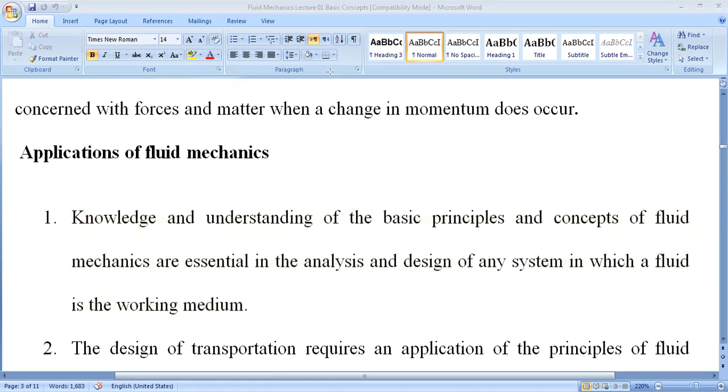Secondly, the design of transportation requires an application of the principle of fluid mechanics. This says that all transportation designing systems require basic principles of fluid mechanics.

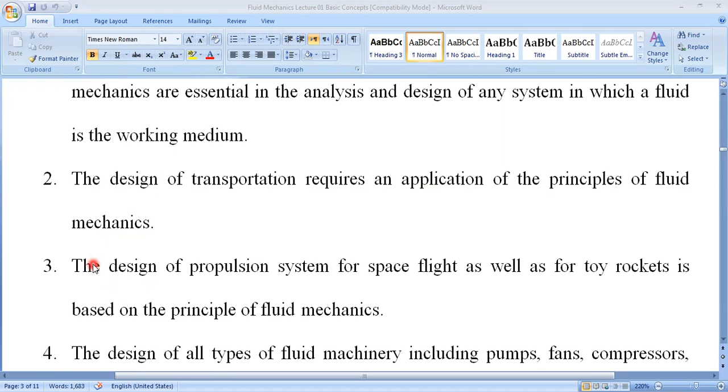Next, the propulsion system of space flight as well as toy rockets is based on a principle of fluid mechanics. Actually, all those systems in which gases or liquids are used, knowledge of fluid mechanics will be very helpful for better understanding.

The design of all types of fluid machinery, including pumps, fans, compressors, and turbines, clearly requires knowledge of basic principles of fluid mechanics. These machineries are basically related to fluid, or the medium in which liquid or gases are used, which is a material medium. So to study all these things, we should have better knowledge of fluid mechanics.

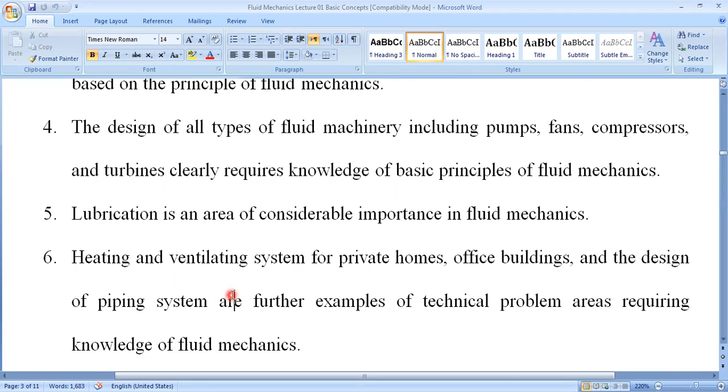Similarly, lubrication is important. Lubrication, heating and ventilating systems for homes, offices, buildings - all these systems basically require a very solid knowledge of fluid mechanics.

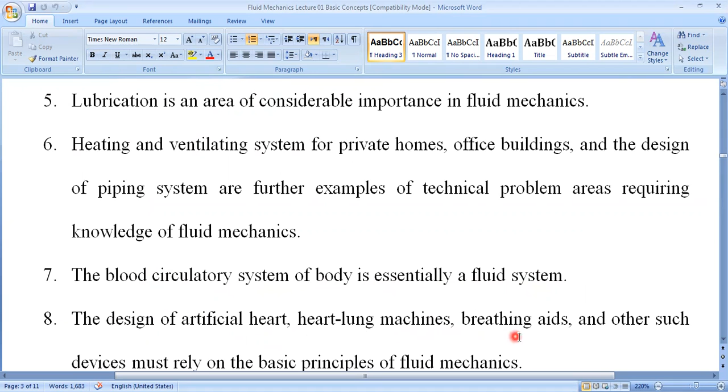Blood circulatory system is essentially a fluid system. The design of artificial heart, heart-lung machines, breathing aids, and other such devices must rely on the basic principles of fluid mechanics.

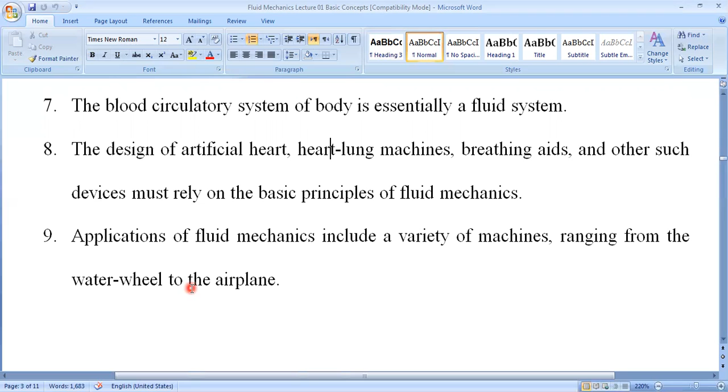The application of fluid mechanics includes a variety of machines ranging from water wheel to airplane. We have a lot of machineries, a lot of systems, a lot of machines in which the rules of fluid mechanics are used.

Study of fluid provides an understanding of a number of everyday phenomena, such as an open window and door together creating a draft in a room. That is a very interesting phenomenon. If we have an open window and door at the same time, that draft is produced due to the motion of air. So air may be categorized under the category of fluid, and this is also included under the discussion of fluid mechanics.

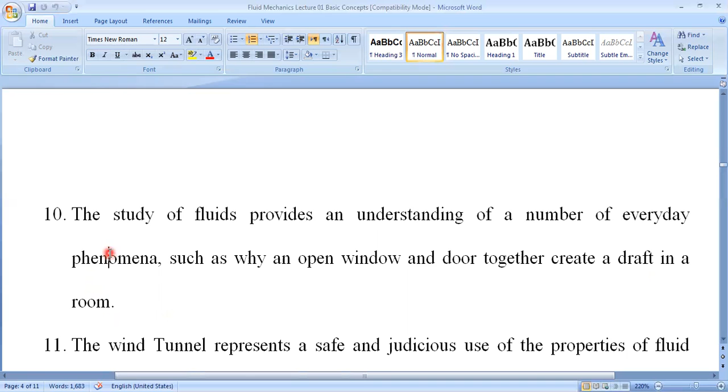Wind tunnel represents a safe and judicious use of properties of fluid mechanics. Till now, we have discussed 11 different applications or fields or places where rules of fluid mechanics may be used easily, or fluid mechanics comes into action for the study of fluid mechanics, or where fluid mechanics principles may come into play.

These 11 principles may be asked in your exam, just like a question: what is the scope of fluid mechanics, the applications of fluid mechanics, how fluid mechanics principles are important, or why these rules are important. So in such types, we may ask a few questions from you in your examination.

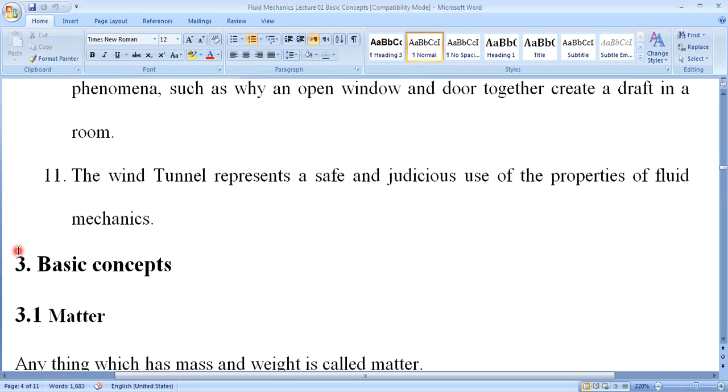Now we have basic concepts. They are very important. From here we have basically a reviewing portion. We will try to revise each and every concept, but I will not describe everything in depth, I will just try to overlook definitions or phenomena or concepts that we have discussed in this section, so that we can summarize the complete chapter, because our focus now is only to revise or to check out our checklist of those things which we have studied in our previous classes.

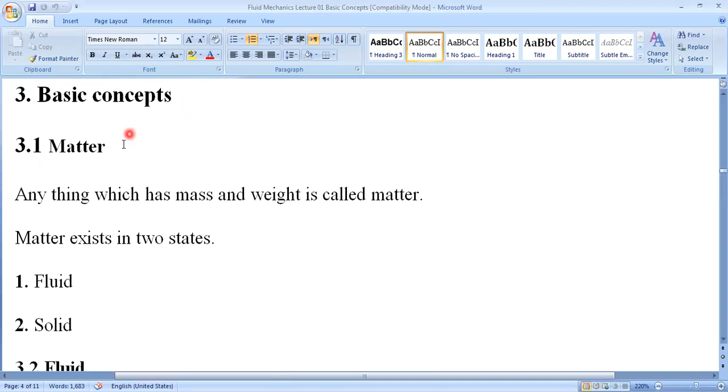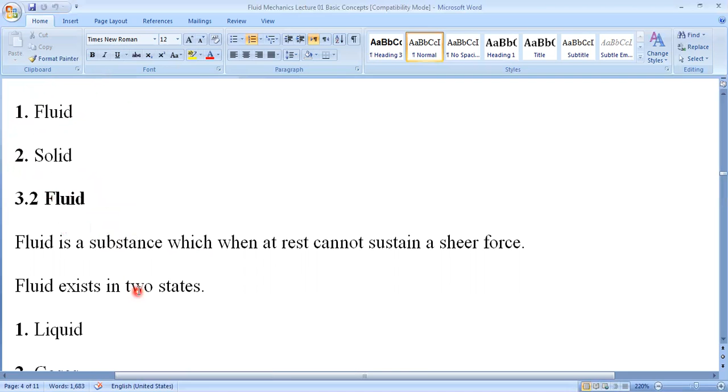First of all, we discussed a few basic concepts, including matter - the definition of matter, that what is matter, anything containing mass and weight - and further we studied that there are two broader categories, fluids and solids. Fluids are the category in which we have liquids and gases, in which liquid is categorized as incompressible flow, which has definite volume but no definite shape. And then gases were the compressible flows, which have no definite volume and no definite shape.

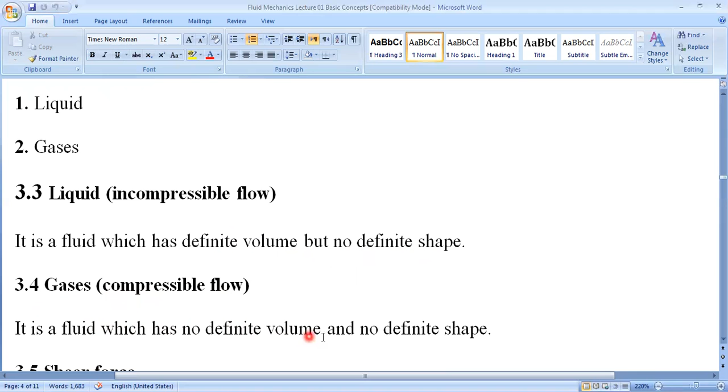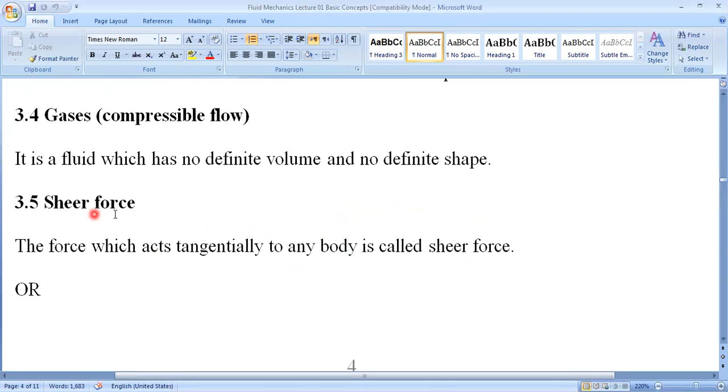After that, there was a concept of shear force. The force was acting along two components, along the surface and normal to the surface. The component of a force that was acting tangentially or along the surface of any body was termed as shear force. So the tangential component of the force is the shear force.

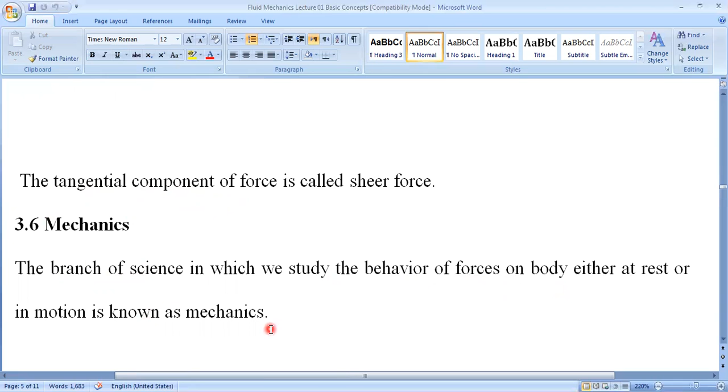The most renowned definition of mechanics: the branch of science in which you study the behavior of force in a body either at rest or in motion is known as mechanics. You are dealing with the bodies either at rest or in motion.

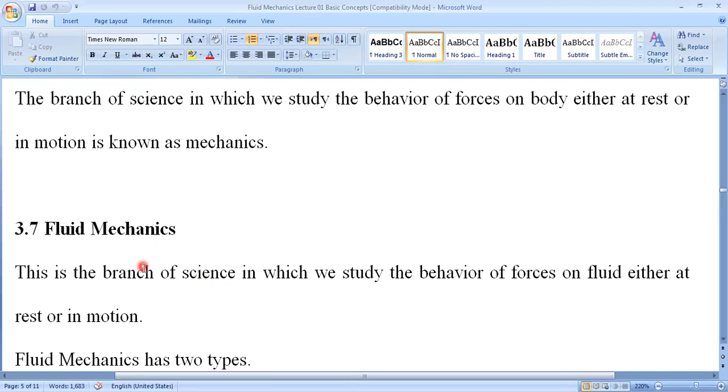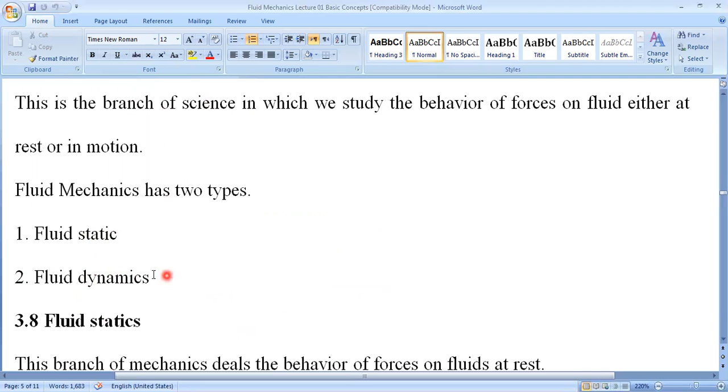After that, we categorized another category, fluid mechanics. What is fluid mechanics? In which you study the behavior of forces either at rest or in motion. If that was at rest, that was fluid statics, and if it was moving with a particular velocity, then that was discussed in fluid dynamics.

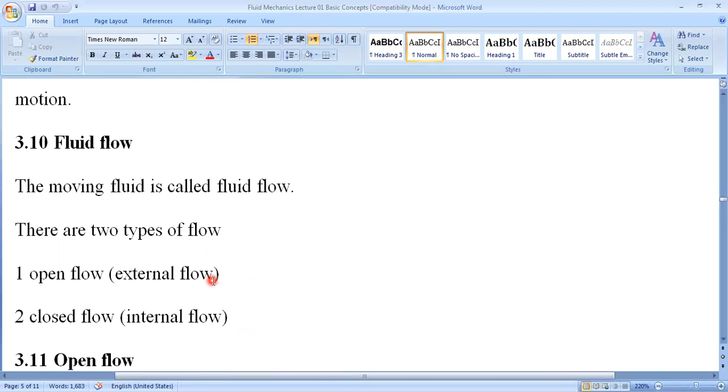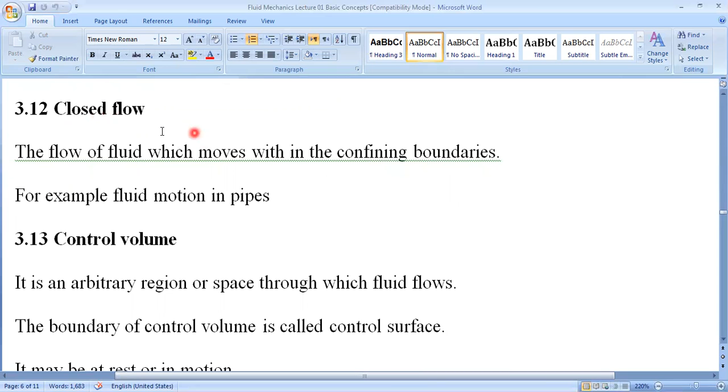Fluid flow, moving flow, was basically fluid flow. There were two types of flow: open flow and closed flow. Open flow was when the confining boundaries were at a relatively large or infinite distance, but between two confining boundaries that was a closed type of flow.

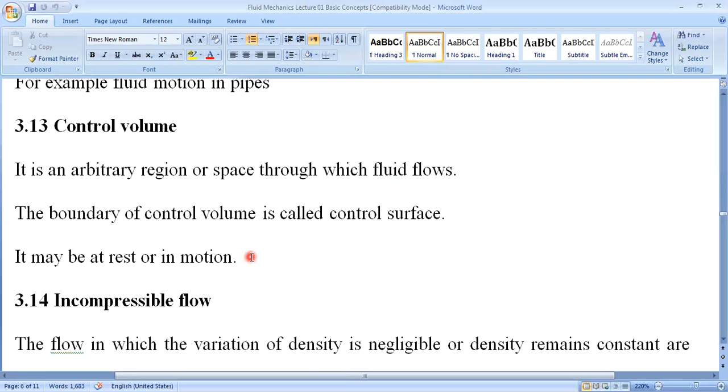Then control volume - till the last topic which we discussed in chapter 4, last article, there were also geometrical diagrams where we assumed control volumes. Control volume was actually an imaginary surface which we assumed, through which fluid can flow. It was an arbitrary region or space through which fluid flows. The boundary of the control volume is called control surface, and this boundary may be at rest or in motion.

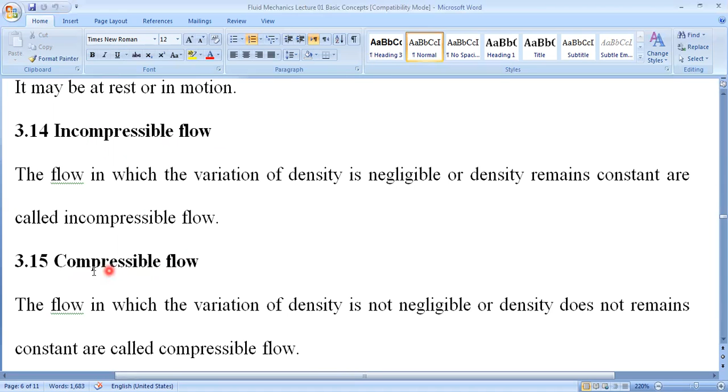Incompressible flow is where density changes are negligible. Those flows in which density changes were negligible were incompressible flow, but those in which there may be significant variations in density were termed as compressible flows.

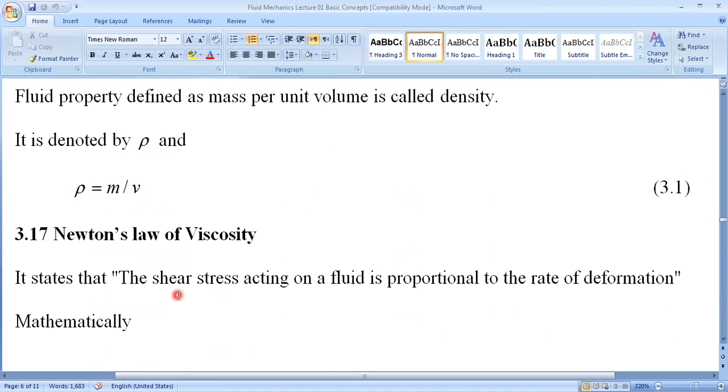After density - fluid property as mass per unit volume was basically density. Newton's law of viscosity: shear stress was directly proportional to the rate of deformation. Mu was the constant of proportionality, termed as the viscosity of the fluid element.

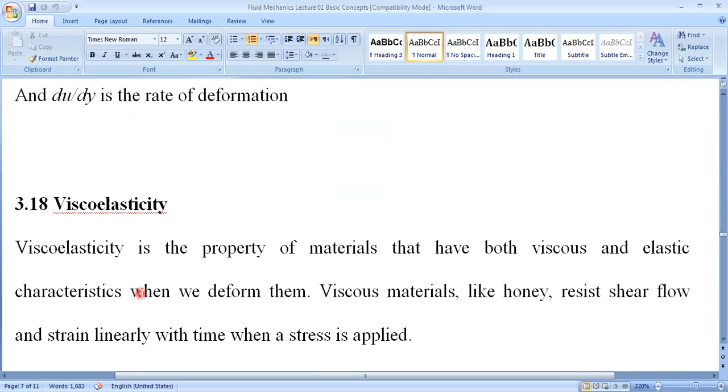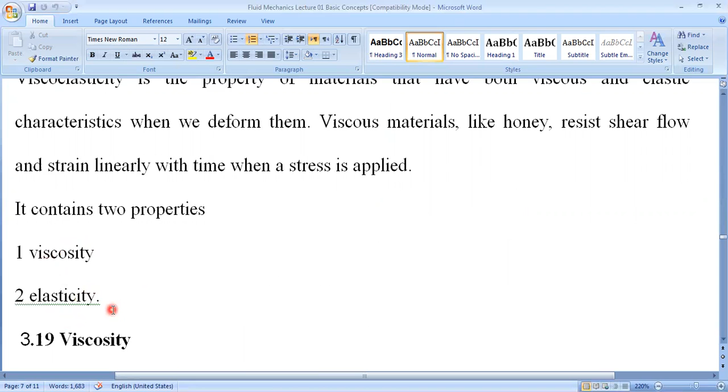Viscoelasticity refers to those fluids having both viscous and elastic effects, containing two properties: viscosity as well as elasticity. Viscosity was the measure of resistance of sliding motion of one fluid layer over another layer, termed by mu. And the nearer the fluid layers were, the larger the viscosity would be.

And that was its mathematical relation, that shear stress was directly proportional to the rate of deformation, and mu was the constant of proportionality. If you solve it for mu, then mu may be termed as tau over du over dy.

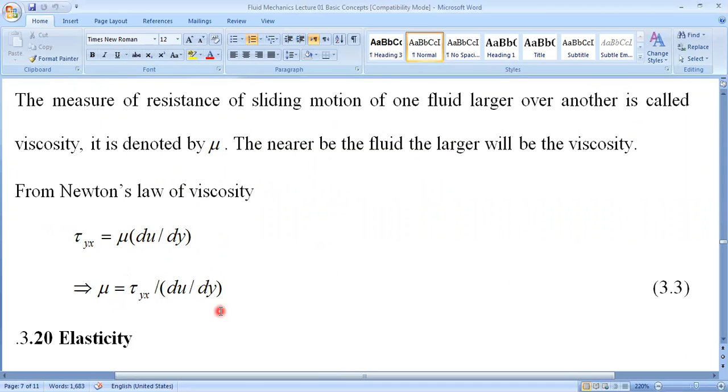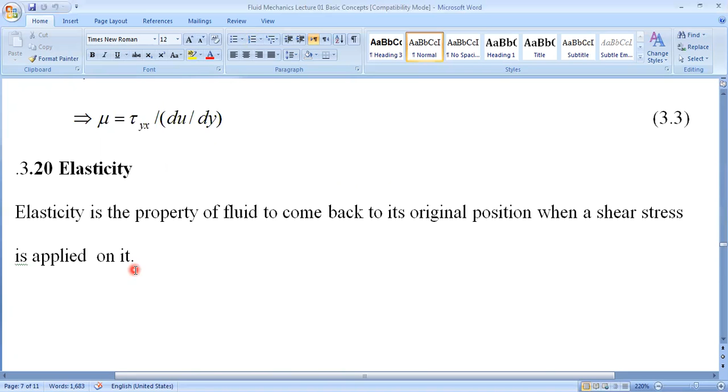After that, we have elasticity. Elasticity is a property of the fluid that comes back to its original position when a shear stress is applied on it, meaning its capacity to return to its original shape or position.

Viscoelastic fluids are fluids that have both viscous and elastic characteristics when we deform them, in which both viscous and elastic factors are present. Honey was the best example, as it is viscous as well as elastic.

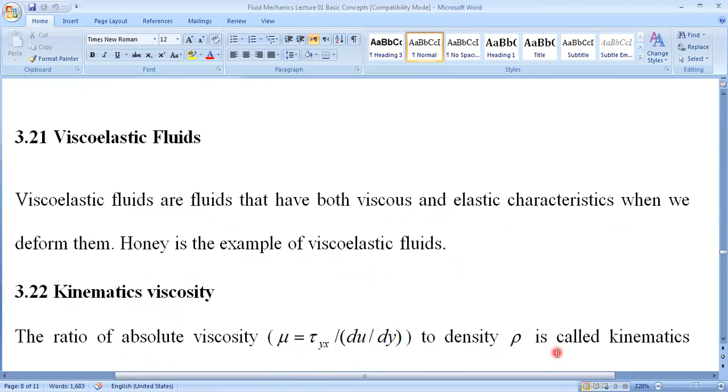Kinematic viscosity is the ratio of absolute viscosity to density, that is mu over rho.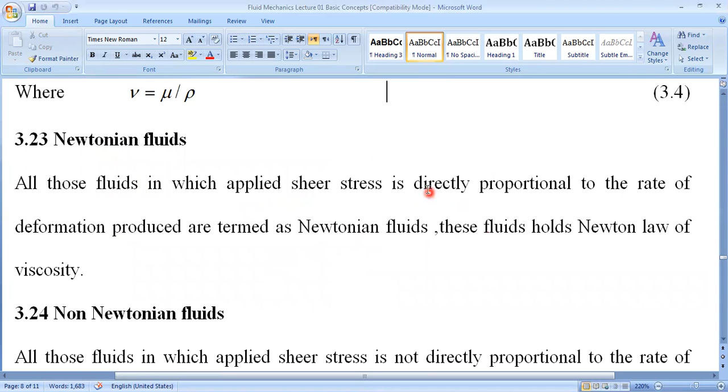Further we discussed Newtonian and non-Newtonian fluids. In Newtonian fluids, shear stress was directly proportional to the rate of deformation. In non-Newtonian fluids, shear stress was not directly proportional to the rate of deformation.

And micropolar fluids, which were a class of fluid having non-symmetrical stress tensor, in which the stress tensor was not symmetrical.

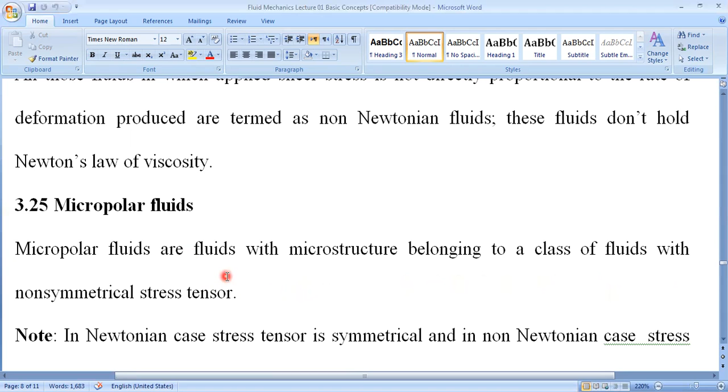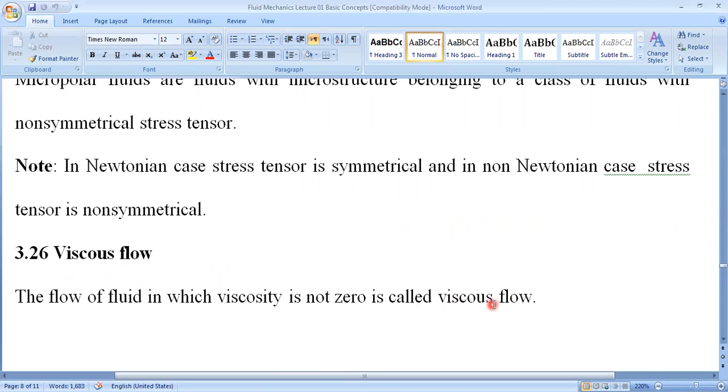Viscous flow refers to fluids with non-zero viscosity. Zero viscosity doesn't actually exist. So as I told you in the very first lecture, here we only have to assume zero viscosity or just imagine it.

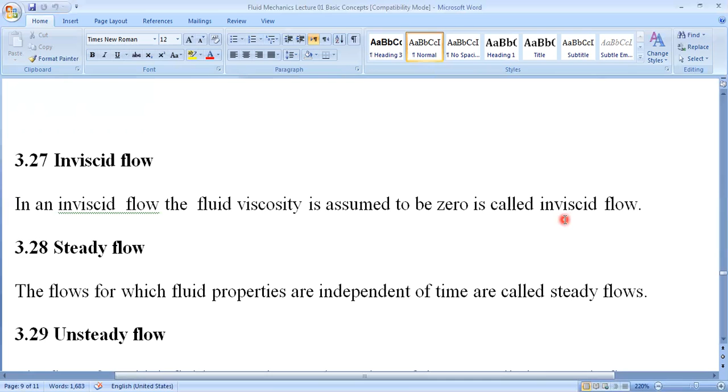Steady flow is time independent, while unsteady flow is one in which the fluid properties also depend upon time.

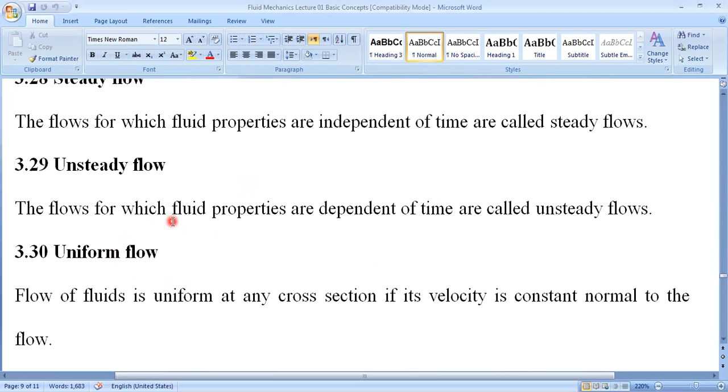Uniform flow is when every cross-sectional area contains the same velocity, or velocity is constant normal to the flow. Non-uniform flow is when every cross-sectional area does not have constant velocity.

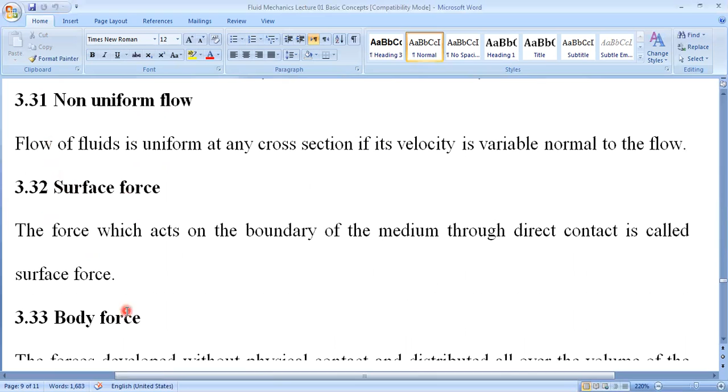Surface force is that acting on the boundary through direct contact, with pressure being the example. Body forces are those acting without direct contact, and electric forces and magnetic forces were the best examples of those body forces.

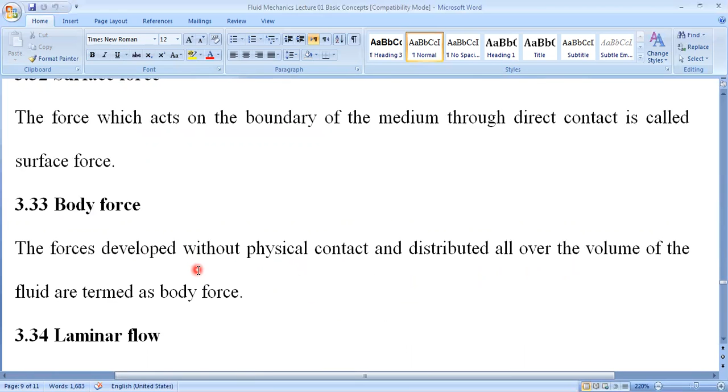Laminar flow is flow in which the laminae are layers, or smooth layers.

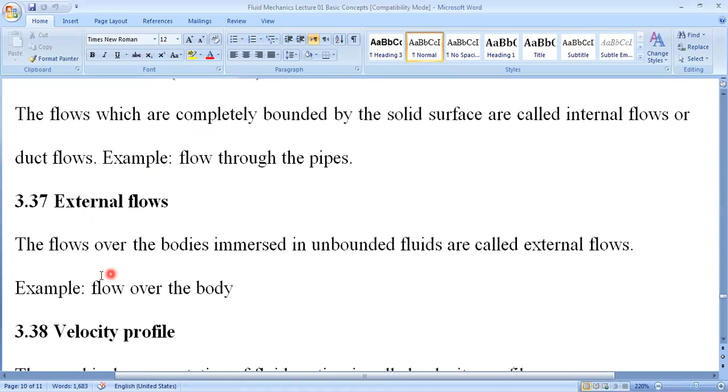We will discuss laminar and turbulent flows, and internal and external flows within confining boundaries. Internal flow is basically inside the boundaries, and external flow is where the body is immersed or unbounded. Internal flow example is flow in pipes, and external flow is flow over a body, just like a ball moving through air or liquid.

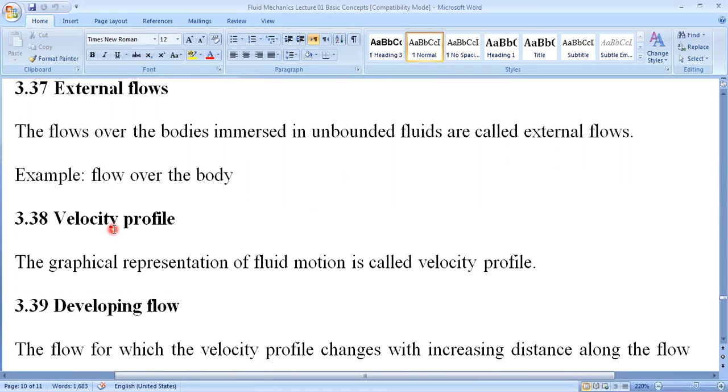Velocity profile is when velocity is represented graphically. Developing flow is when the velocity profile basically changes with increasing distance. That was developing flow.

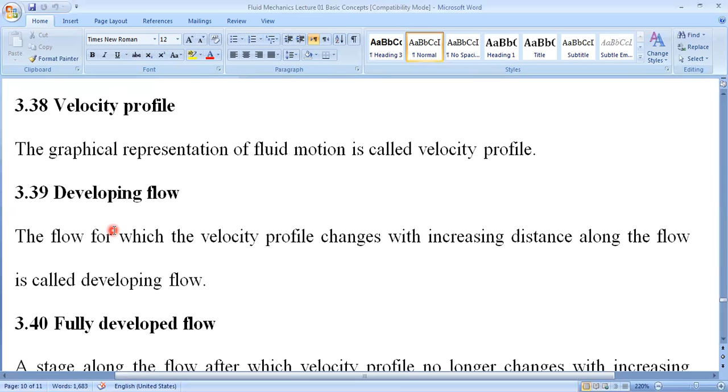Fully developed flow is when, after some time, there will be no further change in velocity. Such a type of flow, after that point, there is no further change in velocity, is known as fully developed flow.

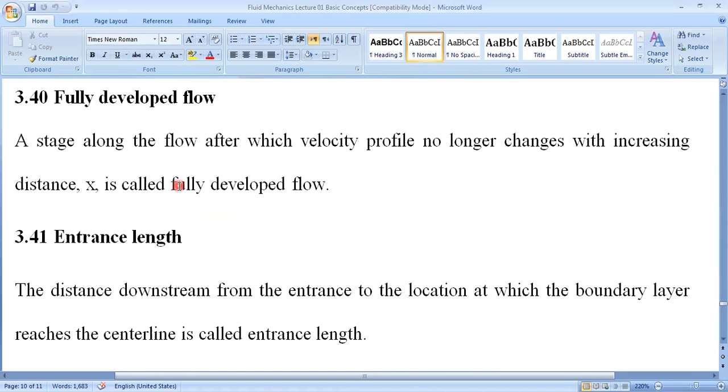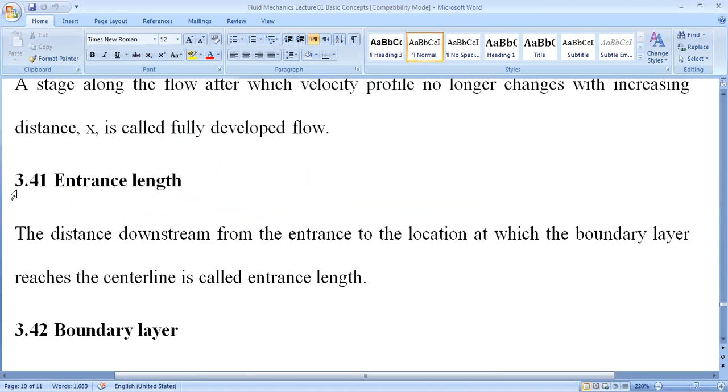Entrance length is basically the downstream length in which the fluid develops into fully developed flow. The fluid basically converts from developing flow and reaches fully developed flow; that is the entrance length.

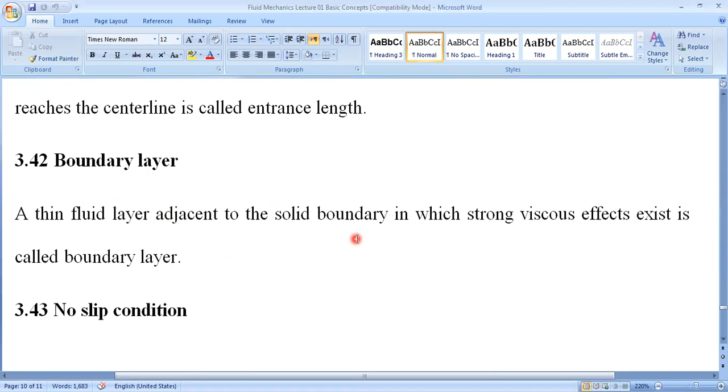Boundary layer is the region near the solid boundary in which strong viscous effects are present.

And lastly, no slip condition: whenever a fluid layer comes in contact with a solid layer, it will move with the same velocity as the boundary. If the boundary is at rest, then the first layer which came into contact will also move with the same velocity, that is zero.

Till now we have finished all the definitions quickly, in a speedy way. You have to know that all these definitions are included in your syllabus, and all of them should be focused on so that you may prepare your paper in a very good way.

Okay, now we move towards chapter number 1 and revise all four chapters for you.